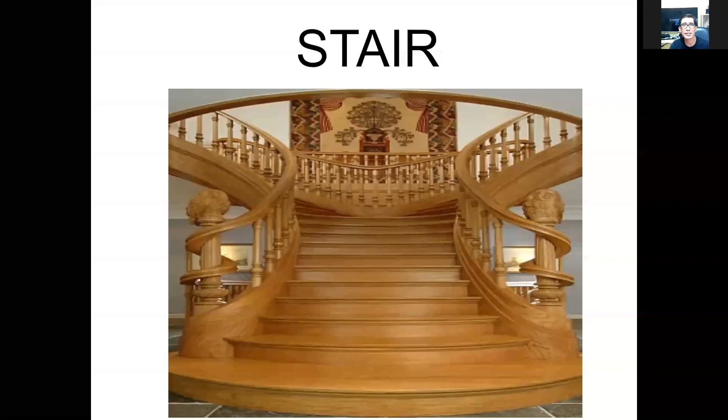So the evolution of the staircase is one of the oldest elements in architectural history, reflecting the prevailing philosophies of symbolic language. Sometimes the stairs are part of the rituals of other buildings. Do we need staircases?

We need staircases to protect people from injuries and to facilitate access during movement from one level to another. So the stairs' main function is vertical transport for people to go up to other floors.

The location of the stairs should be placed at a central location in the building so as to give the shortest access to all rooms. It should be well ventilated and airy. So the main reason why we put the stairs near a centrally located...

...because of pedestrian traffic, we need to put it in the location nearest to the entry to minimize the traffic of people wandering around the building. So that is one reason why we put the staircase strategically very near the main entrance or very near the main traffic of the building.

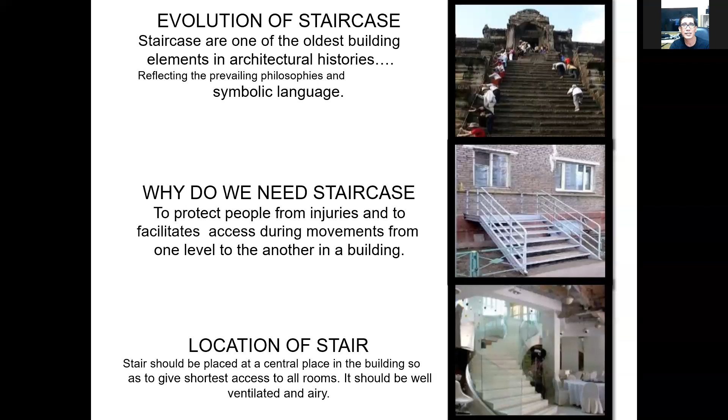The width of the stairs for public buildings should be at least 1.8 meters, and for residential at least 1 meter. The flight of stairs should be restricted to a maximum of 12 steps and a minimum of 3 steps.

You should bear in mind also that in designing stairs, you should break the flight of stairs upon reaching the 12th step. You should break it, then create a landing, then create another flight of steps. So 12 steps is the maximum number of steps.

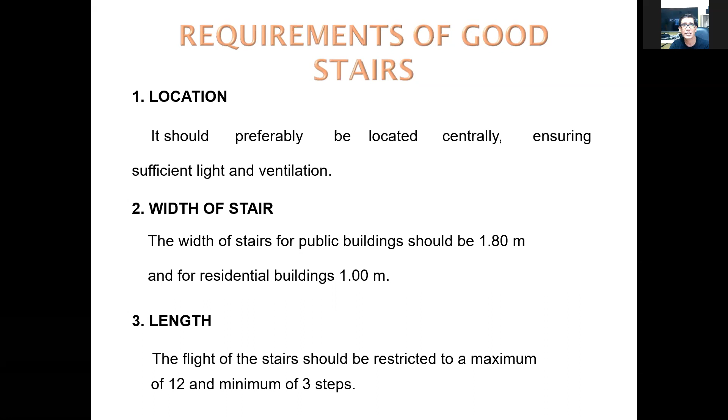And the pitch of the stairs, the slope, should not exceed 400 and should not be less than 250. The pitch means the angle of the flight should be user friendly. If it's too steep, people may not climb it comfortably, so you need to make the angle of the stairs designed for people, including those who may be disabled.

Another consideration is the distance between the tread and the soffit of the flight immediately above it. It should not be less than 2.1 to 2.3 meters. This is the headroom, and the common person is about 7 feet, which is 2.1 meters. There should be enough headroom for people not to bump their head on the next flight or the beam above the flight of stairs.

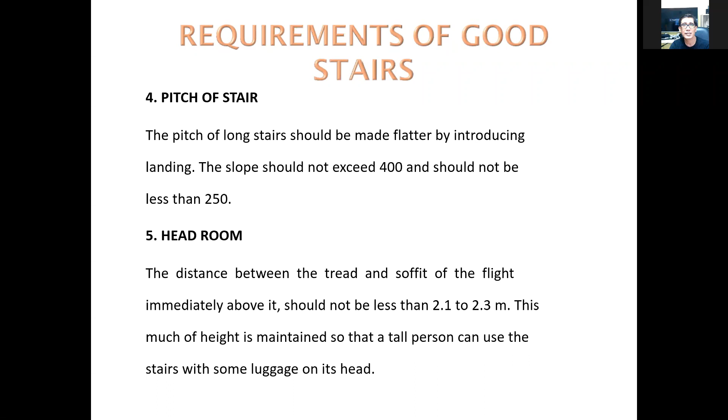Materials should be constructed using fire-resisting materials, and should have sufficient strength to resist any impact. Another consideration is the type of material to be used on stairs. You need to make sure the stair material is fire resistant and has characteristics that can...

...carry moving loads, because sometimes people run going up and down the stairs, so the moving load directed to the stairs should be accounted for, and the stairs should be designed to carry that moving load.

The balustrade: all open well stairs should be provided with balustrades. Those are the vertical balusters at the end of the flight of the stairs.

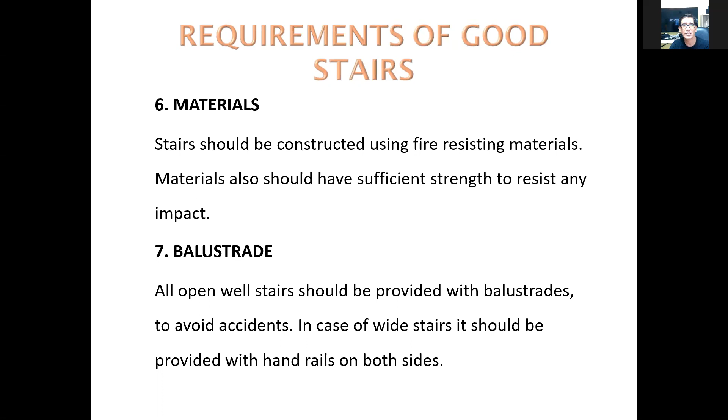In case of wide stairs, you should provide handrails on both sides. If the stairs are adjacent to a wall, you can put a handrail instead of balusters. If it's wide enough, like the steps on LRTs or going up to a church, you can put handrails and railings so that people will not fall down when going down the stairs, or in case they get sleepy, they can hold on to the handrails.

So the landing of the stairs should not be less than the width of the stairs. I will show you some of the drawings later on.

So the winders should be avoided and if found necessary provided at the lower end of the flight. The winders are the steps that are cut into pizza pie shapes. These should be avoided, and in case you need to put this type of winders, you should put it on the lower end of the flight.

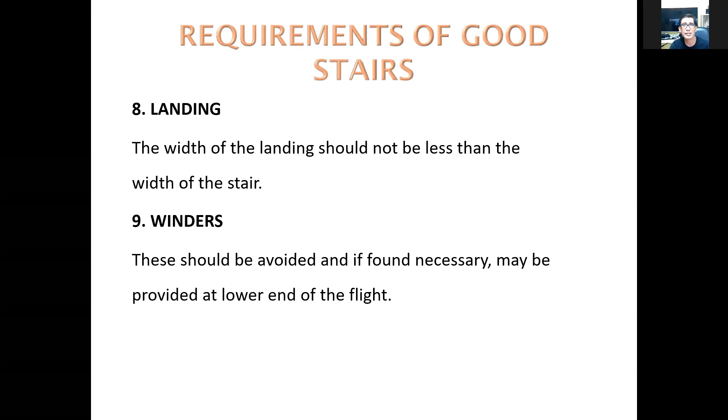These are the principles to be observed while planning and designing the stairs. Stairs should be at least 1 meter wide. The number of steps at a single flight should not be more than 12, as we discussed earlier. The pitch should be about 25 to 40 degrees. Width of the landing should be 150 millimeters more than the width of the stair.

So winders or kite steps, odd-shaped steps, should be avoided. In case found, they should be provided at the start of the stairs. I've talked about the pizza pie shape of the steps - those are the winders. If you need to put the winders, you should put them at the bottom part of the steps.

Handrail should be at least 750 to 850 millimeters in height, so about 75 to 85 centimeters. Those are the handrails. You should always follow those standards, 75 to 85 centimeters, that's the height of the handrail.

Step proportions: the size and rise of the tread in the stair should be kept uniform throughout the whole stair. So the height of the riser and the size of the tread should be uniform on all the steps.

The headroom minimum is 2 meters. Based on the slide before, it's about 2.1, but the minimum - since in the Philippines Asians are not that tall - the minimum height is about 2 meters. That's the headroom. Following the proportions, these are the recommended dimensions.

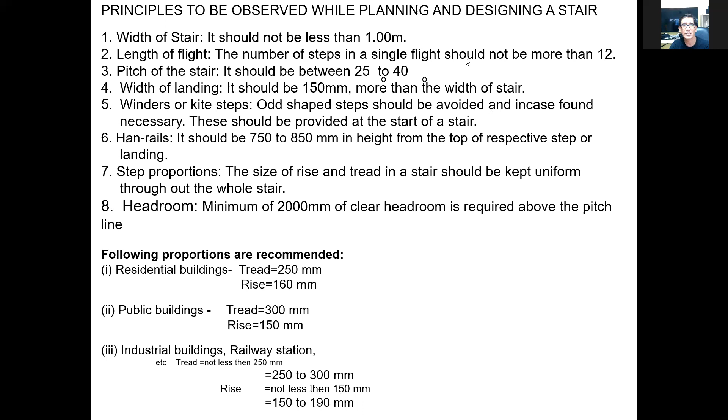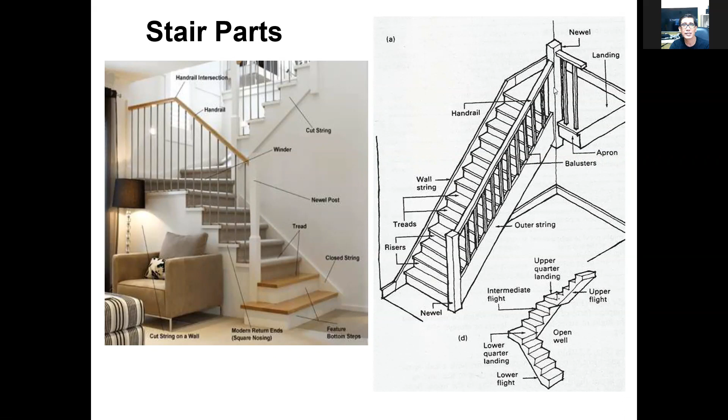So this is the tread and this is the riser. This is the face of the riser and this is the tread. This is the newel post on the bottom and a newel post on the landing area.

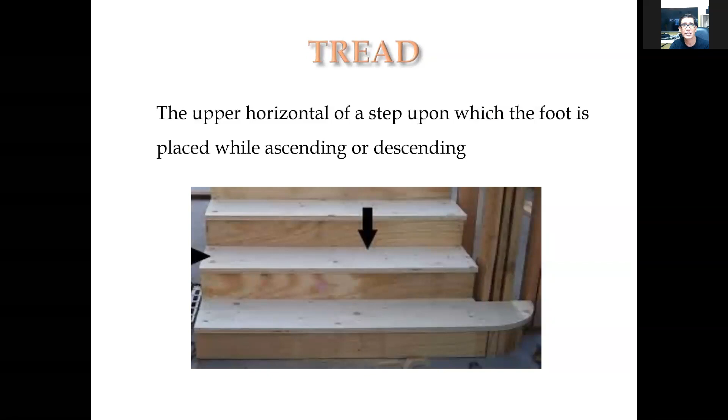So this is the tread. The tread is the upper horizontal part of a step upon which the foot is placed while ascending or descending. This is the part of the stair where you step on when going up or going down - that is called the tread.

Another one is the riser. It's the vertical portion of the step providing support to the tread. This is the riser, this is the part of the stair that should be observed properly. If you create a riser that is too high, the person going up will get exhausted easily.

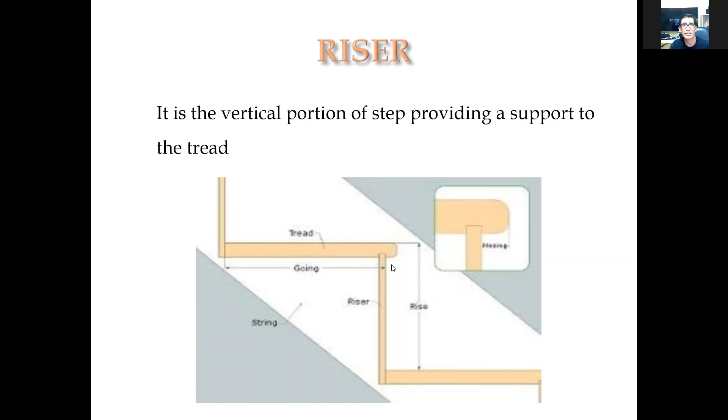You need to make sure that the riser is about 6 to 8 inches in height. That is the riser height.

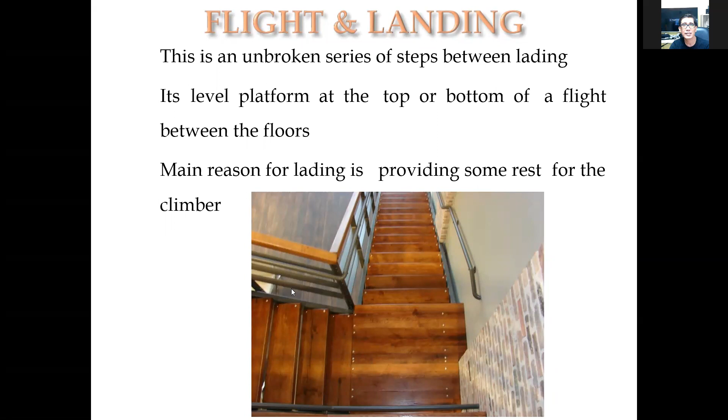Another one is the flight and landing. This is the unbroken series of steps between landings. It's a level platform at the top or bottom of a flight between floors. The main reason for a landing is providing rest for the climber, so this is where you break the flight of steps. You give a maximum of 12 steps going up to a landing, then another 12 steps up to the next landing. That is the way you design stairs.

Another one is the rise and going. The going is similar to the tread, but this is the common term used when you design and calculate the total length of the occupied tread. That is what you call the going. You calculate this because the tread might go up to the bottom part of the riser, so what is the clear opening of the tread, which is between the bull nose of one tread and the bull nose of another tread - that is what you call the going. Sometimes the tread is deeper than the going.

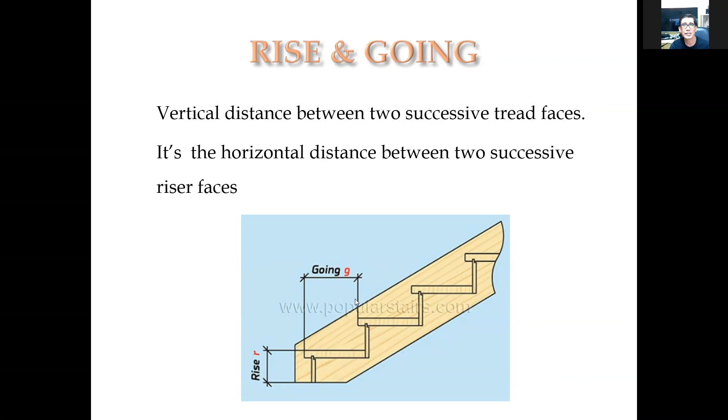Now we have the nosing and the soffit. The nosing is the edge of the tread, and we have different types of nosing to prevent the person going up from slipping or falling down. Sometimes you put nosing with textures or designs that will prevent people from slipping on the nosing. These are sometimes textured so that the shoes of a person going down will suddenly stop because of the nosing texture or finishing. Then we have the optional cove molding underneath the nosing.

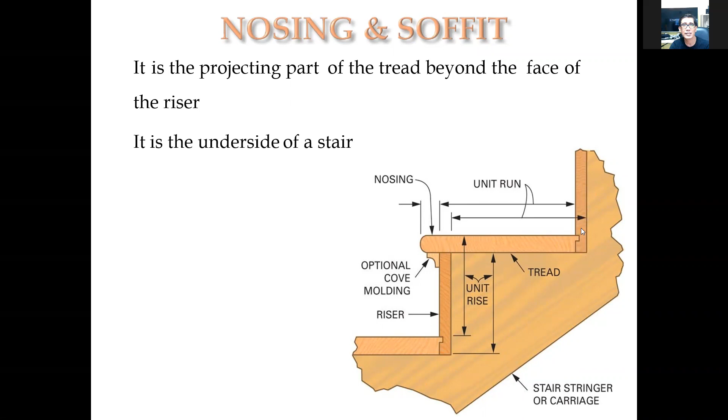Then this is the riser, and this is the tread. In creating detailed drawings, you need to draw this and put dimensions for this detail. For the next plate this week, you are required to create a detail of this stair - nosing, riser, tread - complete with dimensions and the finishes you will use for this component.

Okay, so this is the string - these are the sloping members which support the steps in the stair. If you go back, this is the stair string. If we look at this, this is the stair string. So you put the tread here, then you put the riser here.

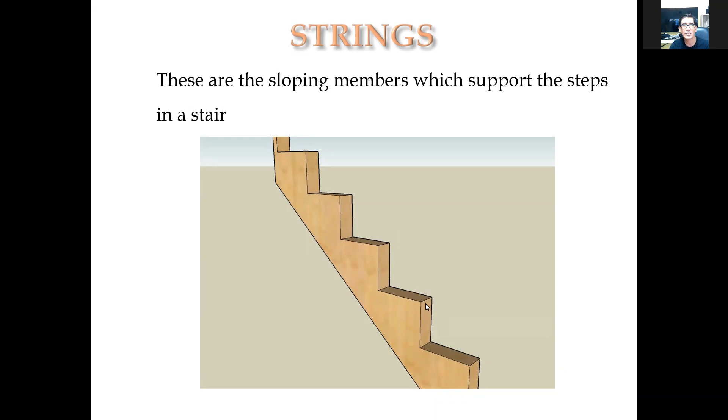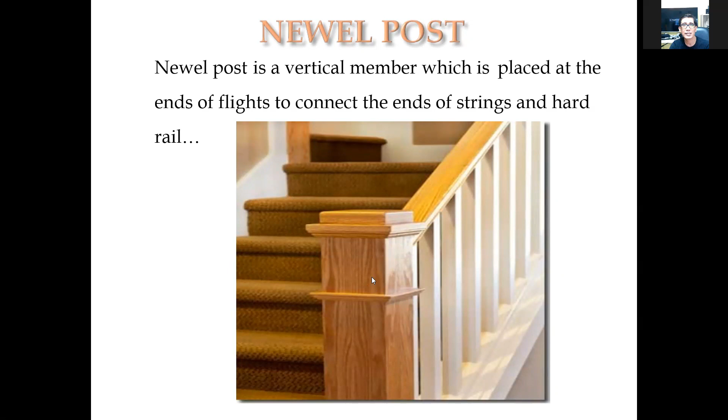Now we call this the newel post. The newel post is a vertical member placed at the end of the flight to connect the end of the string and the handrail. So this is the handrail, and then you put a newel post to make sure the handrail or the baluster is sturdy and doesn't move. This newel post is the component of the stair that holds the balusters or the handrail.

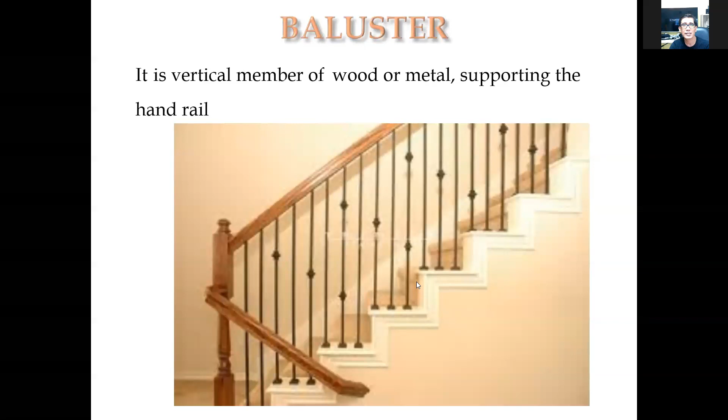So this is the balusters. As you can see, there is a newel post here, and this is the handrail, and these are the balusters. This is the bull nose or the nosing, and this is the riser, as you can see in the detail. The handrail is a rounded or molded member of wood or metal, following generally the contour of the nosing line and fixed on top of the baluster. So this is the handrail.

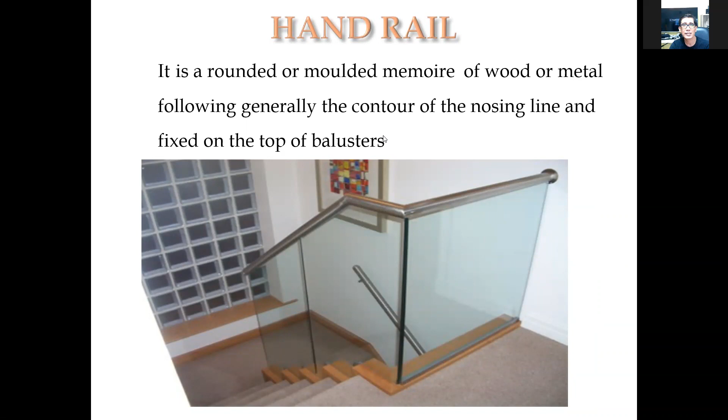As you can see, the balusters can be made of other materials in the design - you can use glass, wood, or steel. Sometimes you don't need balusters at all; you can attach the handrail directly on the wall, as you can see in the detail in the picture.

So now this is the headroom. The minimum is about 2 meters.

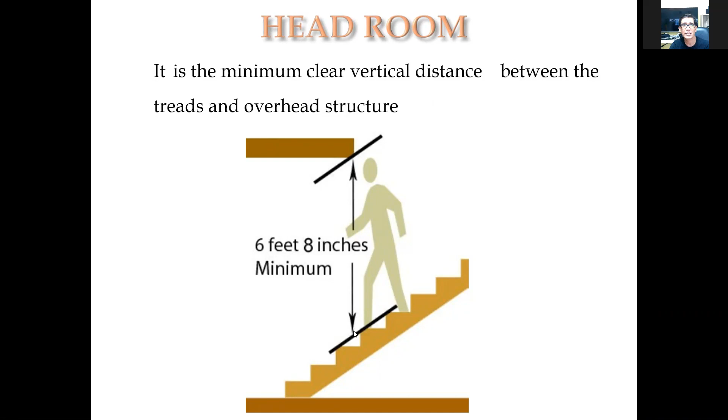In the Philippines, the standard used is a 2-meter headroom. This is the minimum clear vertical distance between the tread and the overhead structure, measured from the nosing of the tread to the overhead structure, which could be a beam or a slab. That is what you call headroom, approximately 6 feet 8 inches, or about 2 meters, but not less than 2 meters.

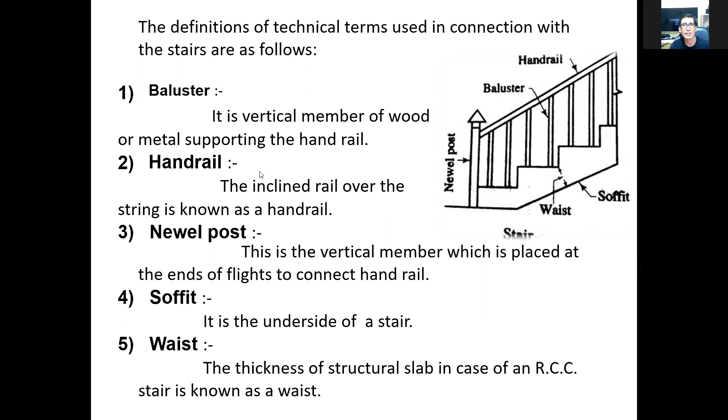These are the definitions of the different parts of the stairs. We've discussed this on previous slides, but I need to post this on the PowerPoint so that in case we have an examination, you can read the definitions.

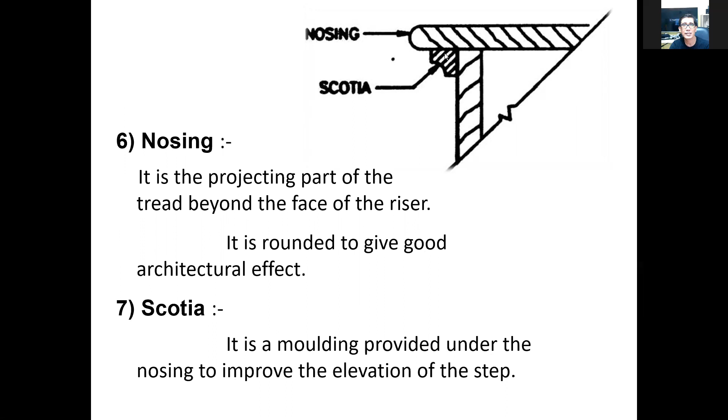So these are the nosing. The scotia is the molding provided under the nosing, so this molding is called the scotia. Another part is the step, which includes the tread, the rise, and the going.

The flight is a series of steps without any platform. The landing is the end of a flight. The run is the total length of the stairs in the horizontal plane, including the landing. So if you calculate the total area occupied, including the platform, that is called the run.

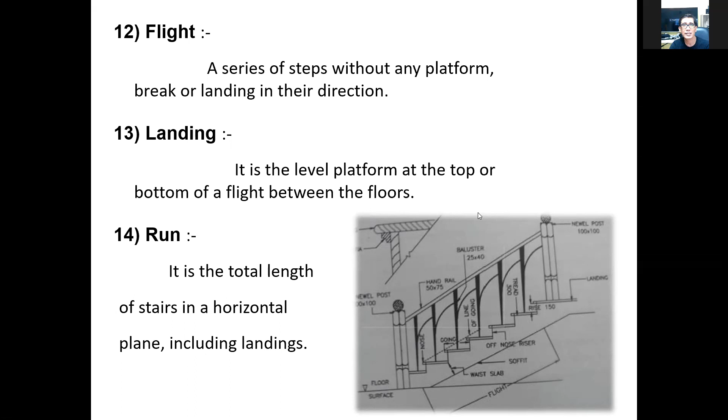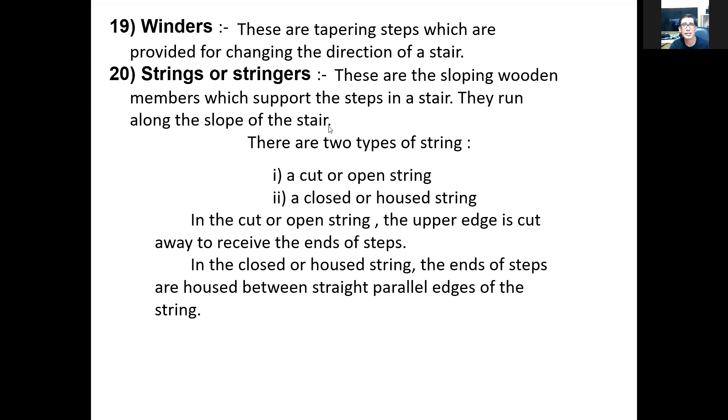We also discussed the headroom, the slope, the riser, the nosing, the winders, the string and the stringer, the balusters, and the walking line. The approximate line of movement of people on a stair during ascending or descending is known as the walking line, situated at a distance of 450 millimeters from the center of the handrail.

That is the most frequent area of the stair that people walk into, measured 450 millimeters, or about 45 centimeters, from the handrail. That is the walking line, where people always walk.

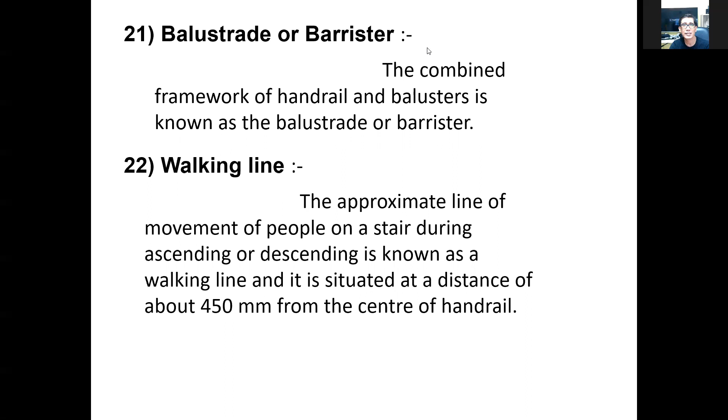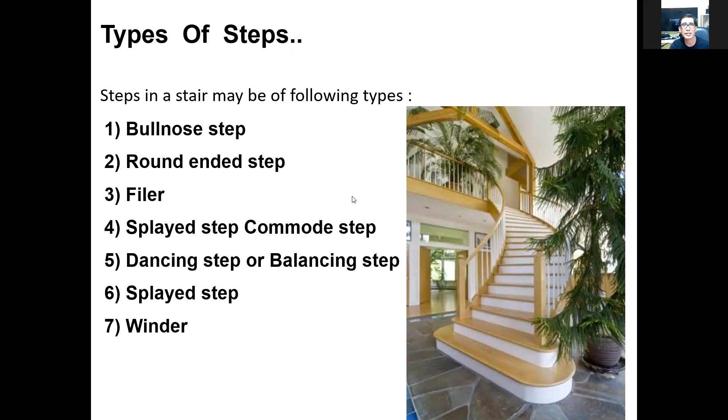Now we have the different types of steps: the bullnose step, the round-ended step, the splayed step or commode step, the dancing step or balancing step, and the winder. We will define each of these different types.

The bullnose is generally provided at the bottom of the flight, projecting in front of the newel post. The end near the newel post forms a quadrant circle. That is called the bullnose step, and this one is called the round-ended step.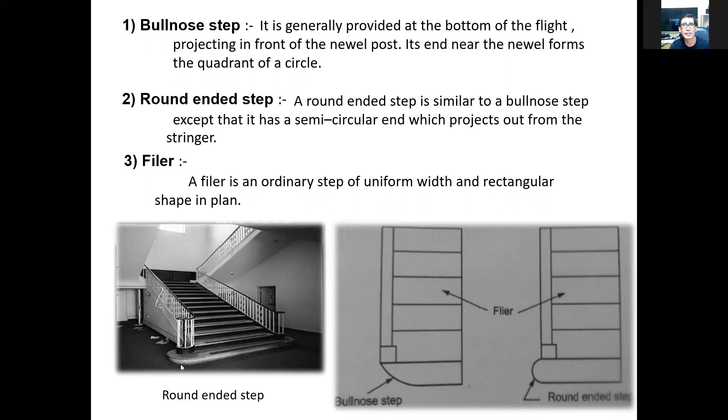These are designs you can incorporate in your stair layout—you can put a bullnose or a round-ended step. These are common designs seen in old buildings during the American period or the neoclassical era, where they used the round-ended step and the bullnose step.

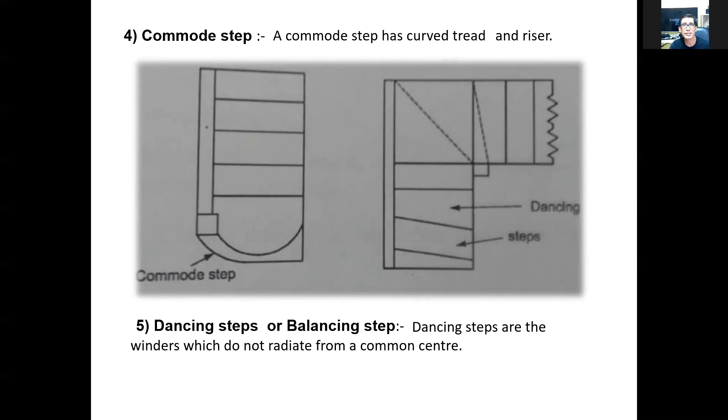This one is the commode step, and this one is the dancing step. You can see you can create different designs on the stairs by creating different configurations of steps.

Another type is the winder, also called the pizza pie steps, commonly seen in cases where you have limited area, so you need to put more steps to create winders.

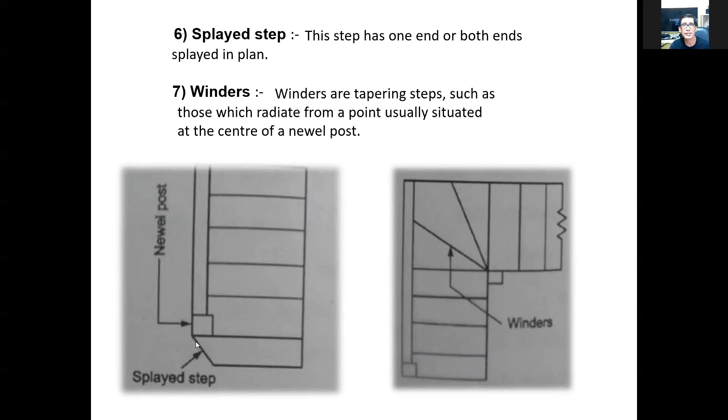So this one is the splayed step, no, like the bullnose or the rounded, no, there's a 45-degree type. Another one, this one is the geometry of the stairs.

Stair safety and geometry are related with rhythmic movement along the straight line. It is important for safe ascent or descent. As I've said before, you need to make sure that the riser and the going or the tread is always the same height or width in all of the steps of your stairs. That is one basic principle in doing a stair design. You need to make sure that the height of the riser and the going width or the actual tread width and the pitch is all the same or uniform in all of the steps of the stairs.

You need also to observe the proper height of the riser and proper width or length of the tread or the going. So the going or the tread needs a minimum width because the size of the foot of the person going up or down may not fit, or may not step properly on the tread. If it's too small, the heel or the toe of the person might not step properly on the going or the tread. The heel of the person might fall or might not step accurately on the tread or the material of the tread.

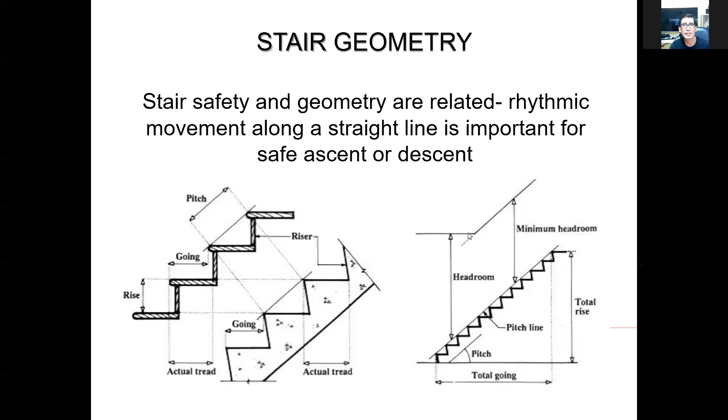So the stair angle, as you can see, we have 26.5 degrees or 45 degrees. This is according to the fixed platform, walkway, stairways, and ladder design, construction, and installation guidelines. The stairway should be angled between 26.5 to 45 degrees, that's between 1:2 and 1:1. You should observe this stair angle so that people going up or going down will not get exhausted.

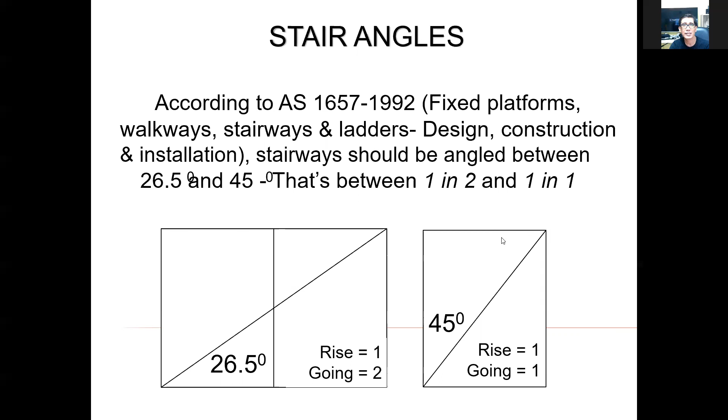The landing must be at least 30 inches deep and 22 inches wide, at every 12 feet or less of vertical rise. Unprotected sides of the landing must have a standard of 42 inches with guardrail system.

So that is the end. The landing is what we put at the end of the flight of stairs. The flight of stairs is about a maximum of 12 steps. After reaching the 12 steps, you put a landing. That is what you call the minimum - the landing must have at least 30 inches and 22 inches in dimension.

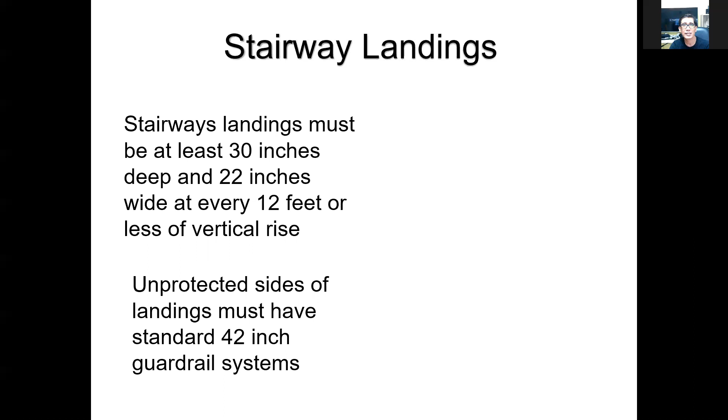Okay, so the platforms and swing doors - this is where the door or gates open directly onto a stairway. Provide a platform that extends at least 20 inches beyond the swing of the door. This is one basic principle in designing the platform or landing at the end of the stair flight. If you have a flight of stairs like this one, and there's a door at the end of the flight or the landing, there should be a clearance of 20 inches at the edge of the door when it is open, so that people will not fall down the landing or platform when the door is open. This is the 20 inches, what you call the swing door clearance.

This is a common mistake of architects and designers. If the swing door does not meet the 20 inches clearance, people might fall down when they open the door.

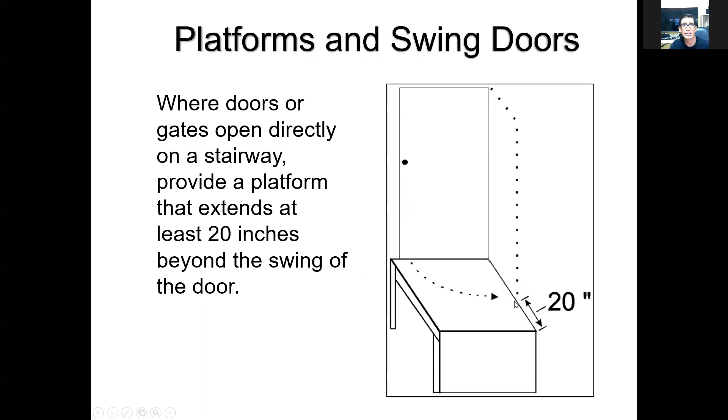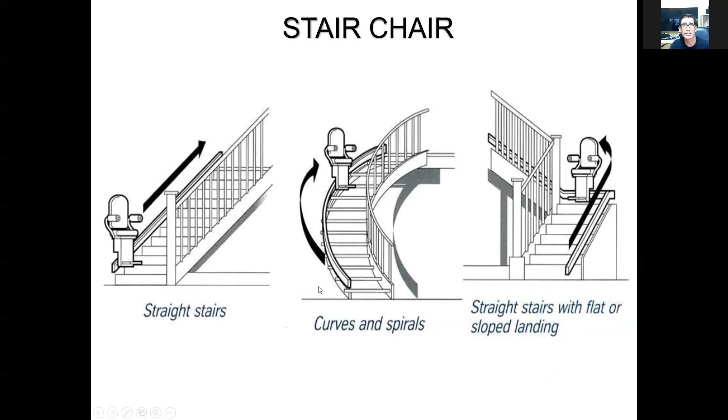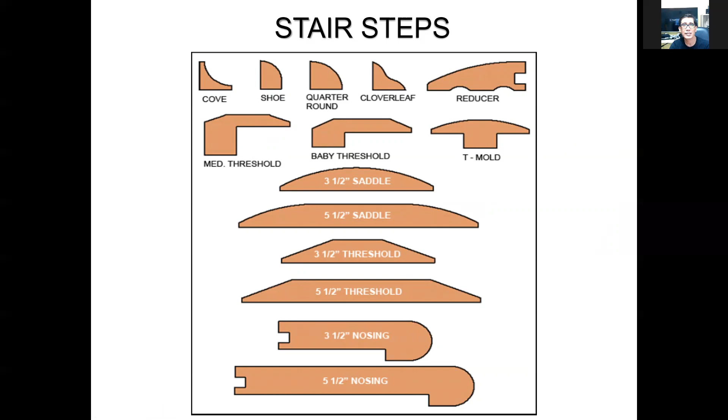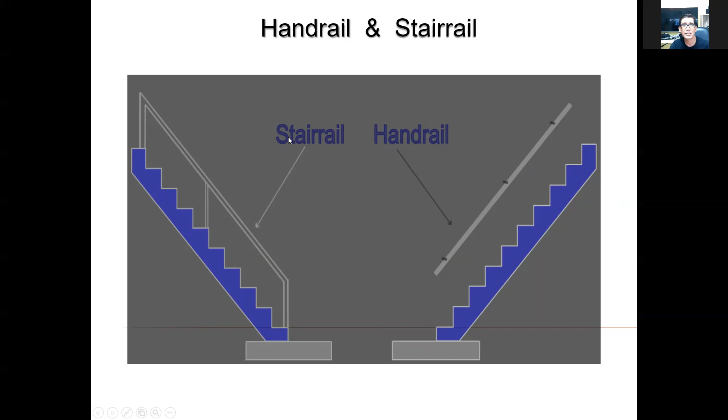So these are the different types. Now, this is the handrail. The handrail is commonly seen when it is attached to a wall, and this is the stair rail, if it is attached to a baluster. This is a technical term we use in construction. If we mean handrail, it is attached to a wall. If we mean stair rail, it's attached to a baluster.

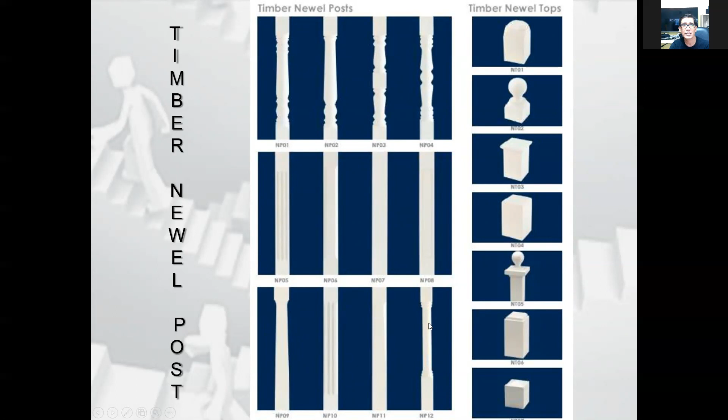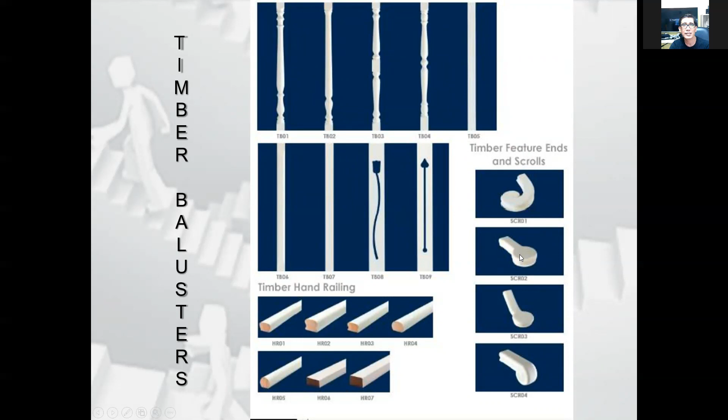So these are the balusters, and these are the hand railing. This is the hand railing, these are the balusters, and these are the scrolls. This is commonly located at the end of a handrail, at the corner of a handrail, or even at the bend of a handrail, we put scrolls. So these are steel balusters.

Different designs of steel balusters.

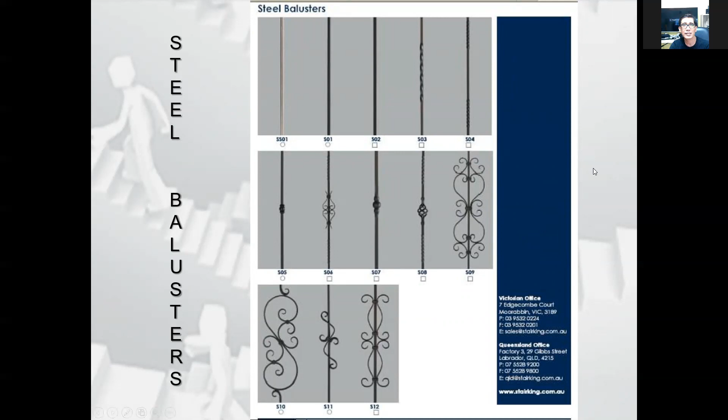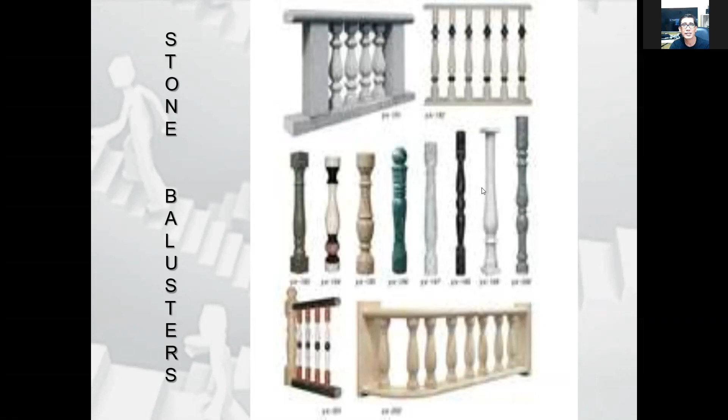So we have the different types of materials used in stairs and their benefits. We have timber. Timber gives design flexibility, it is lightweight and easy to install. This is the commonly used material in houses, the timber stairs.

We also have glass, which gives an openness and clean, airy feel to a room, other than materials that just don't provide that. We also use stainless steel, used for handrails and balustrades. Steel is also used for handrails and balustrades, and also used for fire exits. It can be seen on steps or different parts of the stairs.

Another one is stone. This is the most sturdy, or most efficient type of material, which is the stone.

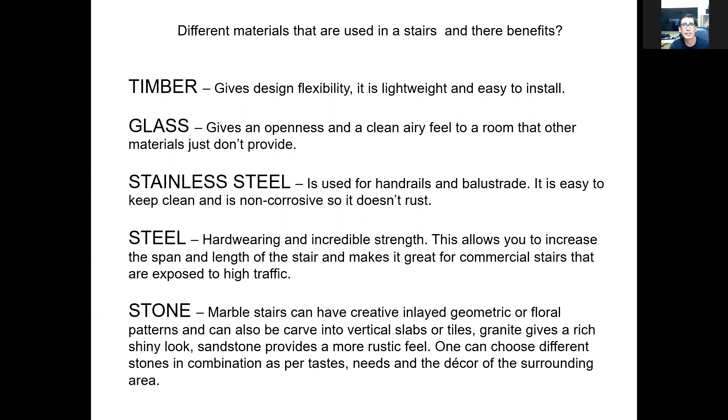So this is the staircase lighting. This is another one that enhances the design of the stairs. You can put stair lighting at different areas of the steps.

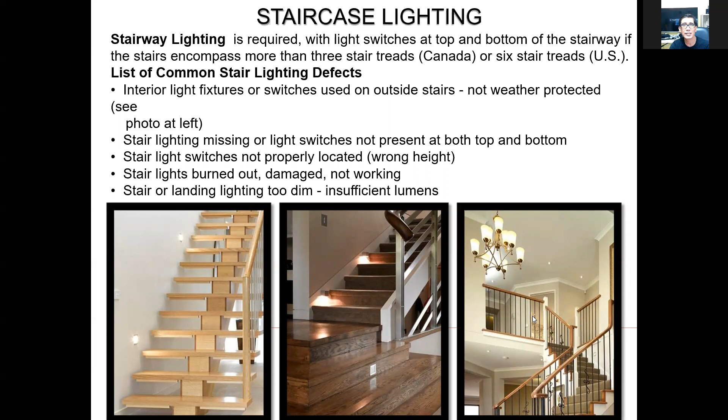These are the latest types of stairs that we see. This is the steps, or the steps are hung via metal attached to the upper floor. This one used glass as the balusters. This one, they used metal wires as balusters.

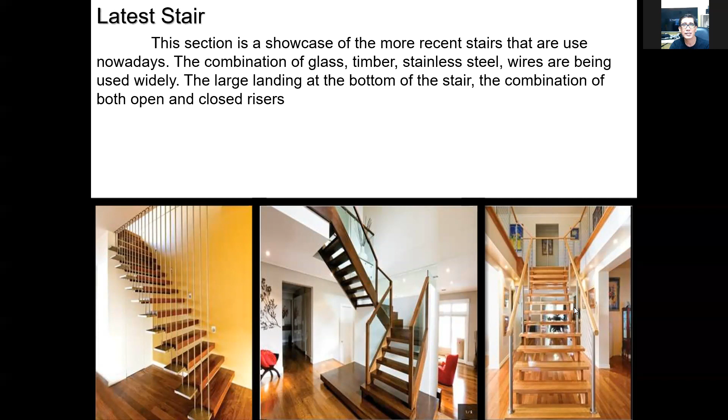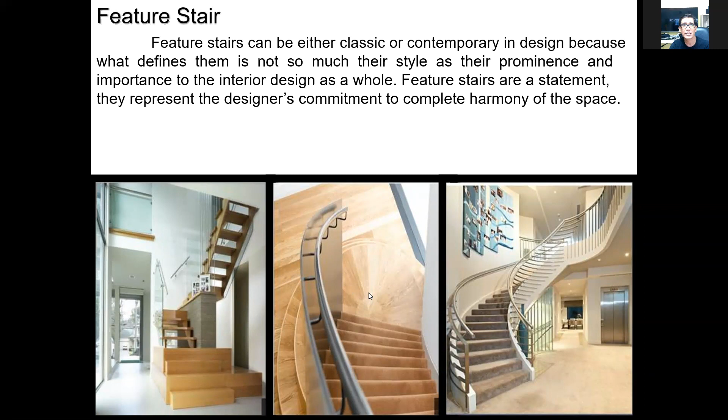So another one, this is another design. This is a winding stair. This is another type of stair design, this is a contemporary stair, commonly used in residentials. The contemporary mixture of different materials, but commonly used wood, and this one, they use carpet.

In other countries they use carpet on the stairs, so that it will lessen accidents. If you fall down, it will lessen the impact.

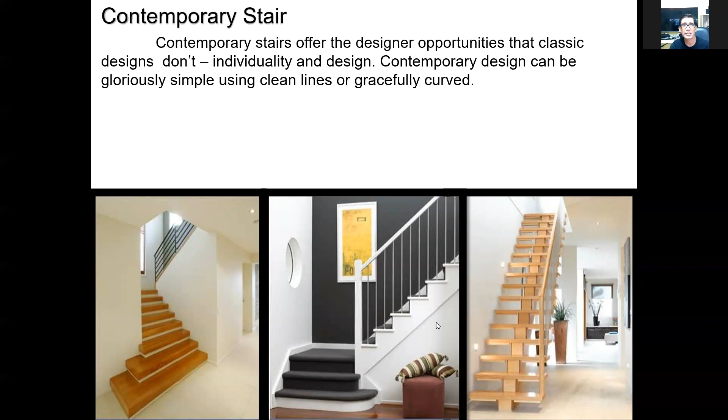So another one is this, the curved stairs. These are curved stairs. This is the modern stairs.

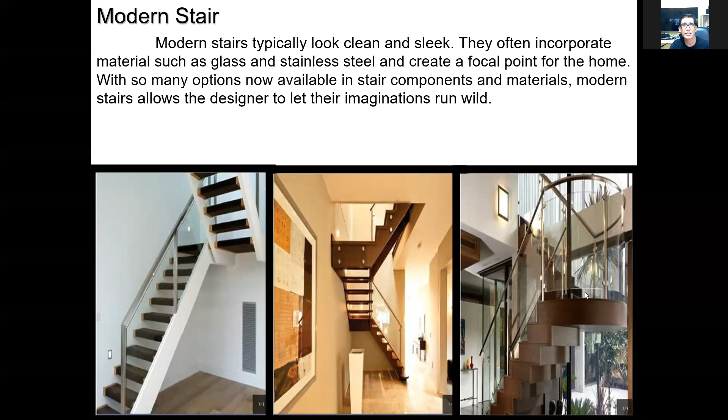These are classic stairs, no? Classic.

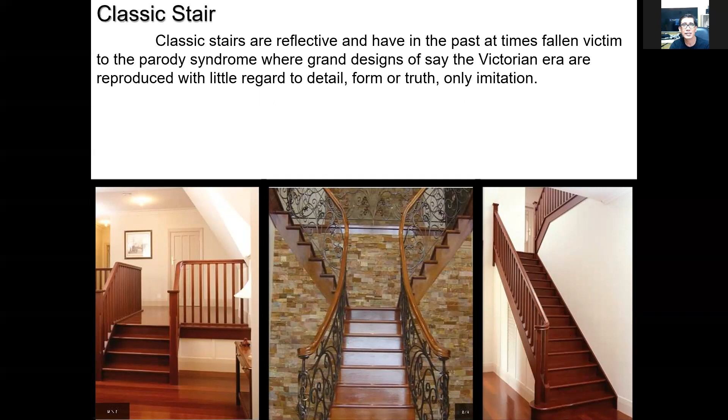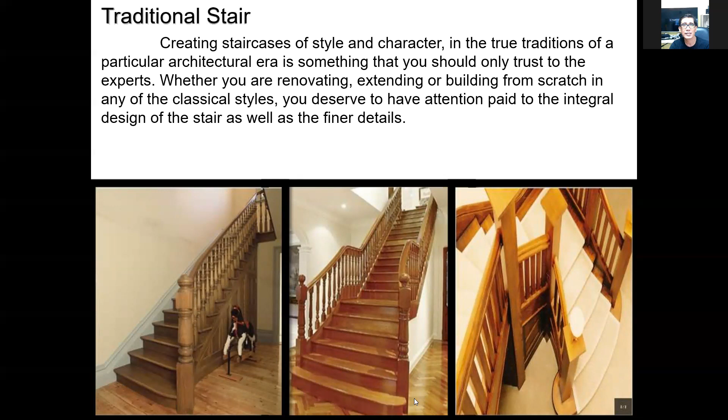So as you can see, these are the samples that we discussed earlier. The first step, this is the rounded first step. These are the traditional stairs, and as you can see, on the first step they put designs.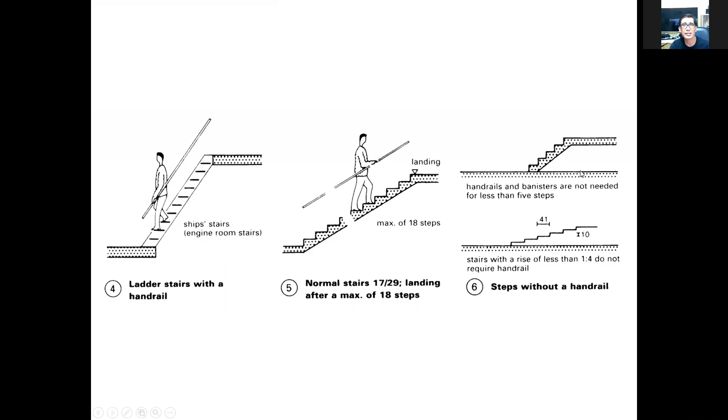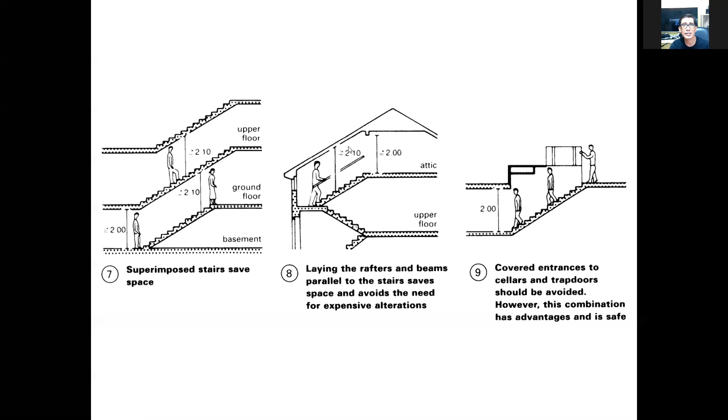This one, as you can see, laying the rafters and beams parallel to the stairs saves space. If you create an attic, you can make the slope of your roof or rafter the same as the angle of the steps, so you can achieve the 2.1 meter clearance, or a minimum of 2.0 meters.

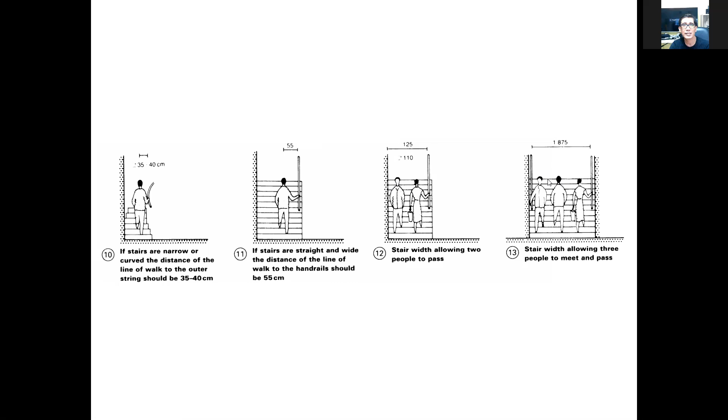You need to have 125 centimeters or 1.25 meters. If there will be three people going up the stairs, you need about 1.875 meters. So 1.25 to 1.1 for two persons, 1.875 for three persons. Okay, so these are the standard widths.

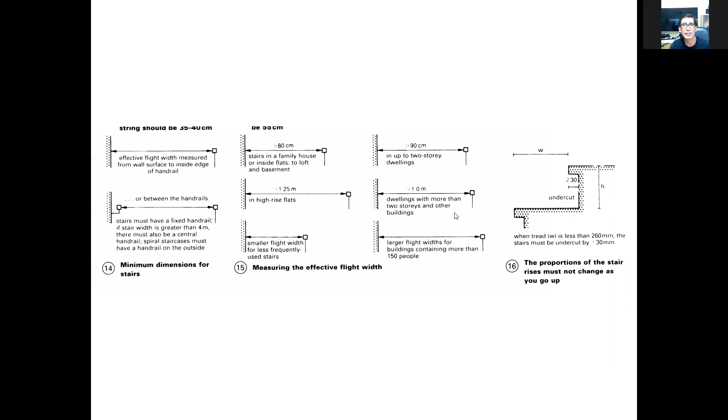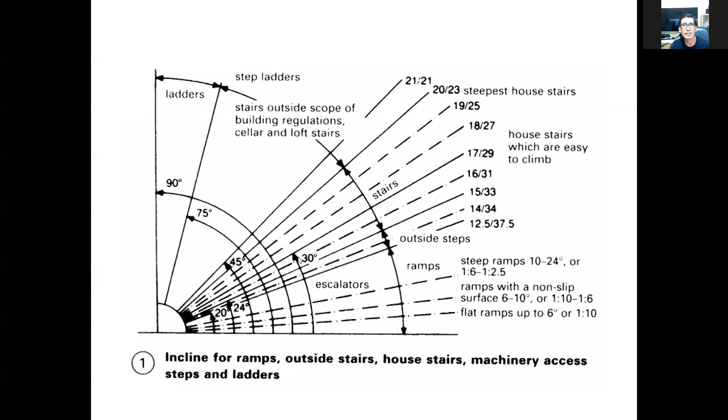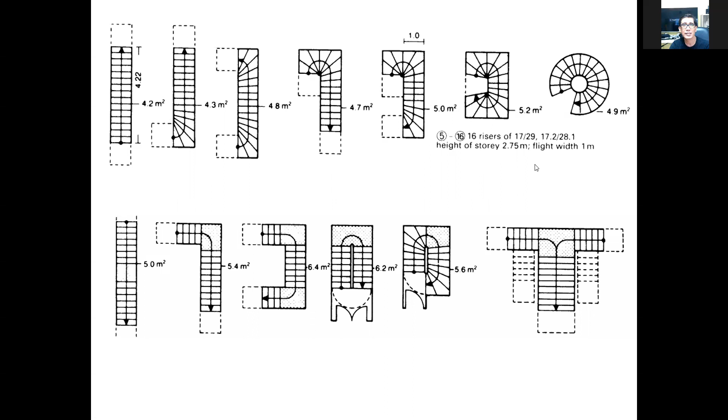So these are the different types of stairs. We will discuss this in lecture number 2, the different types and shapes of stairs.

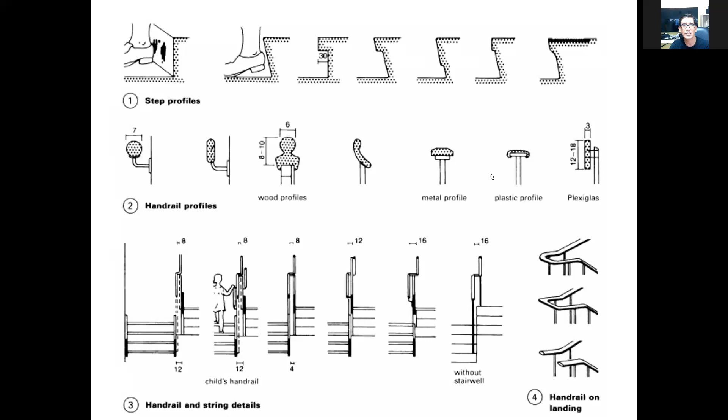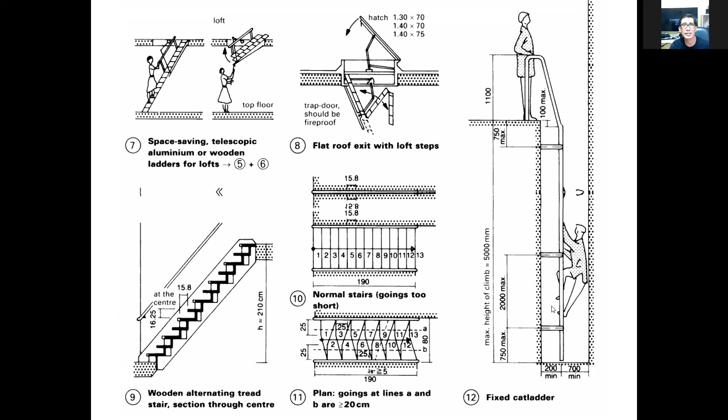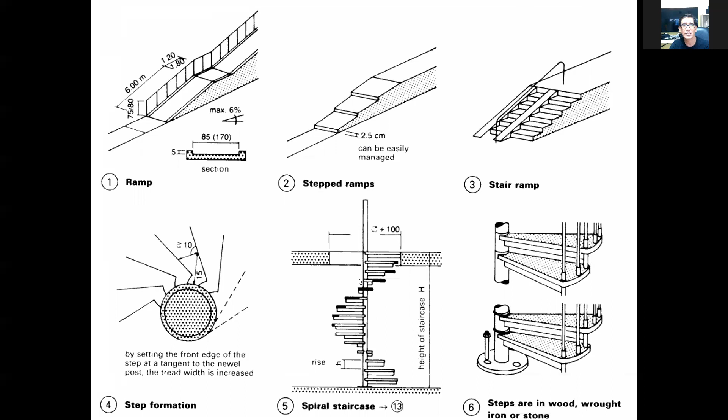Okay, so these are the ramps. And these are the spiral staircase.